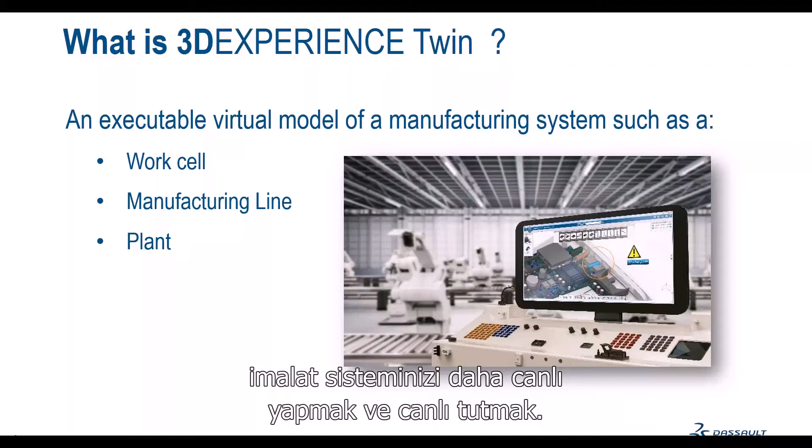Then for 3D experience twin, what is it? It is in fact a virtual model of your manufacturing system, and this manufacturing system can be a work cell with one robot or a special machine, for example. It could be a complete manufacturing line, so several robots and machines linked together. It could also be the entire plant with all your production system inside, working in a virtual world. The idea of this 3D experience twin is to make your manufacturing system alive. Now we are going to show you how we are doing that.

So first, why? What for the 3D experience twin? You have to know that making a 3D experience twin is dedicated to two kinds of users. The first kind will be a production company who needs to see their manufacturing line in a virtual world, to be able to check and make modifications in the virtual world before making modifications in the real world. So our first use is production companies.

But we have also a second kind of user: companies who are building manufacturing lines or work cells. For those people, we can propose a tool to help them define their new work cell or new manufacturing line, so that they can optimize everything.

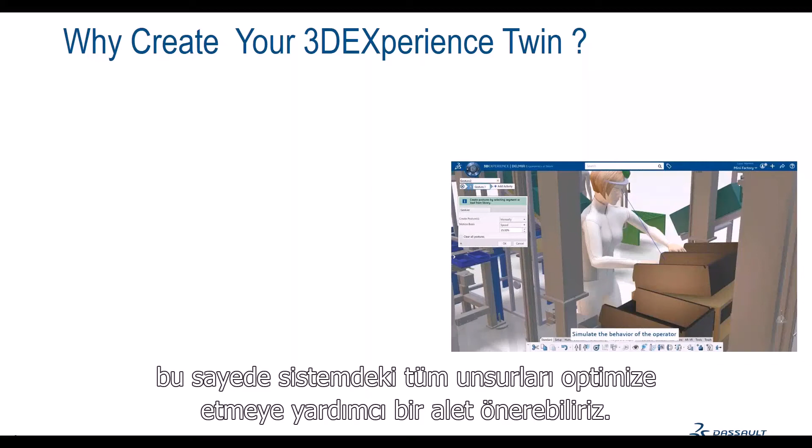So why do we create a 3D experience twin? The first idea is to save time and cost for our users. The idea is to be able to make better decisions before doing modifications in a manufacturing line, whether it's a new manufacturing line or an existing one we want to modify. The idea is to check everything virtually before applying those changes in the real world.

So the idea is to check new product introduction. For example, if you have to adjust the manufacturing line for a new product, you can check that in the virtual world. The second use case is when you want to accelerate production — let's check in a virtual world to identify bottlenecks, for example, and try to optimize virtually before doing it in the real world.

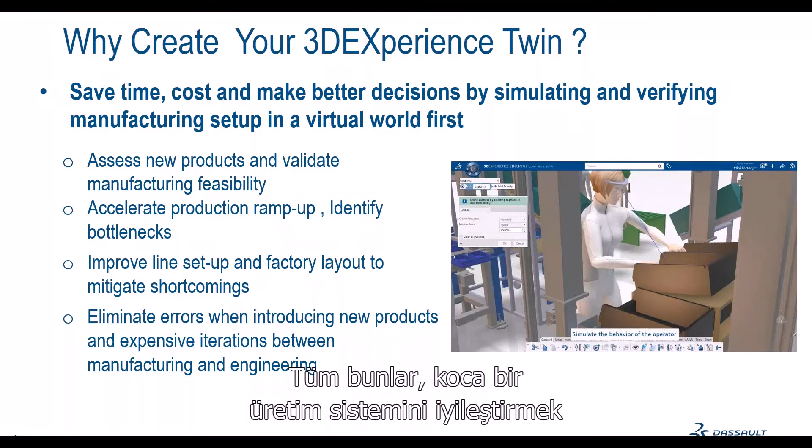The idea also is to improve the setup and layout of a production line. Before moving any machines, let's move them in the virtual world to be sure we'll have a better production system with the new positioning. And the idea is also to try to eliminate errors and problems which could happen when making changes in manufacturing. So those are some different reasons why we use a twin to try to improve our production system.

Now I would like to introduce some words about how we create a 3D experience twin. Damiano and Kartik will show you how we can do that, but let's introduce the idea. First, you understood that we are using the 3D experience platform to do that.

With the 3D experience platform, we are able first to plan operations. Here we are talking about listing all items I need to start my production, for example. I will define a manufacturing bill of material, and I will also define each operation necessary to build my product. So here, in fact, I'm defining my manufacturing operation thanks to the 3D Experience platform initially.

With that information, I can feed the ERP system, but I can also feed the next step of my twin, which is first the layout of a plant. If I know each operation needed to build a new product, I can display those operations inside the virtual plant and then do some studies thanks to the next steps I'll show you. But first, about plant layout: the idea is to use existing data, and that data can come from different sources mixed into the same view.

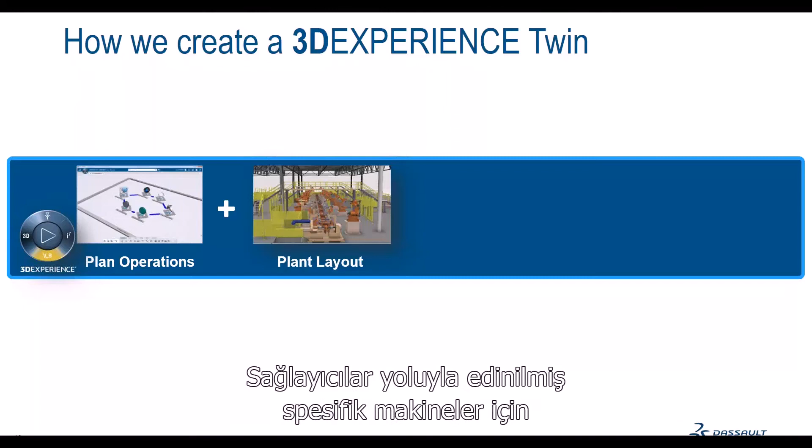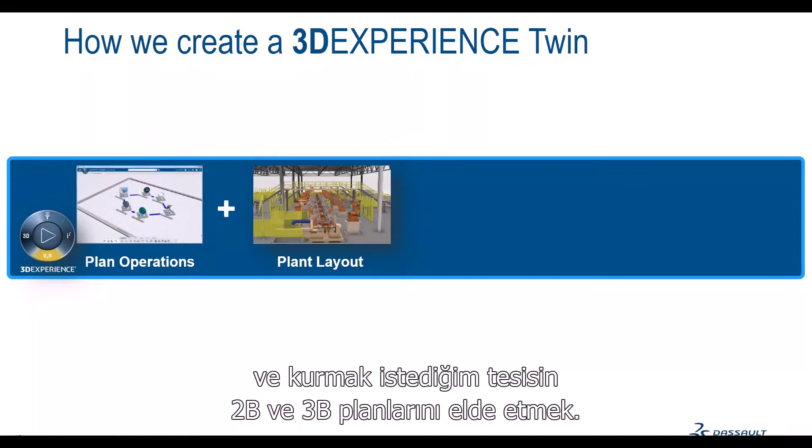With the layout, I can import 2D drawings of the factory, CAD information for specific machines from providers, and also my own CAD data coming from my engineering office. The idea of the plant layout is to mix different sources of data into the same screen, giving a 3D and 2D layout of my future plant.

Once I have my virtual plant in this 3D environment, I can do some simulations. Here we're talking about machine simulation, because we can define kinematics on machines, and also robotic simulation, since we provide a catalog of robots. The most common ones on the market are available, and I think we now have 2,000 robots in this catalog. So we can do machine simulation to check reachability, accessibility, and to avoid clashes with the environment. This simulation is done independently for each work cell.

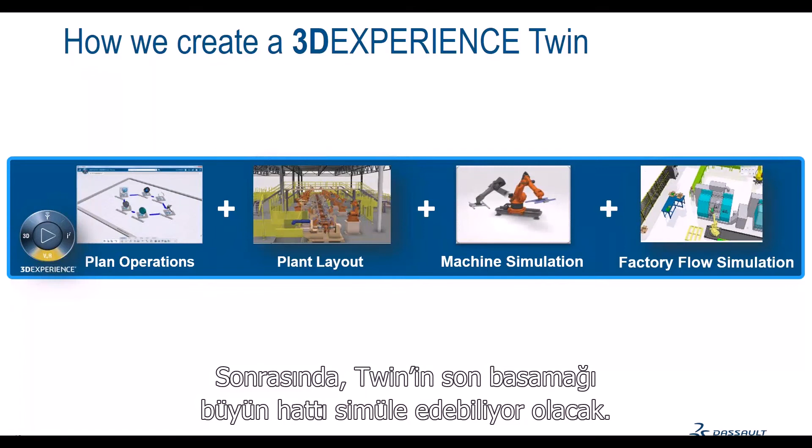The last step of a twin is to simulate the entire line, so we can display our manufacturing system really alive in the twin, check production rates, get KPIs, and make decisions to change things and improve how it's producing. The idea is to satisfy the three pillars: efficiency, performance, and innovation. This is the 3D Experience twin.

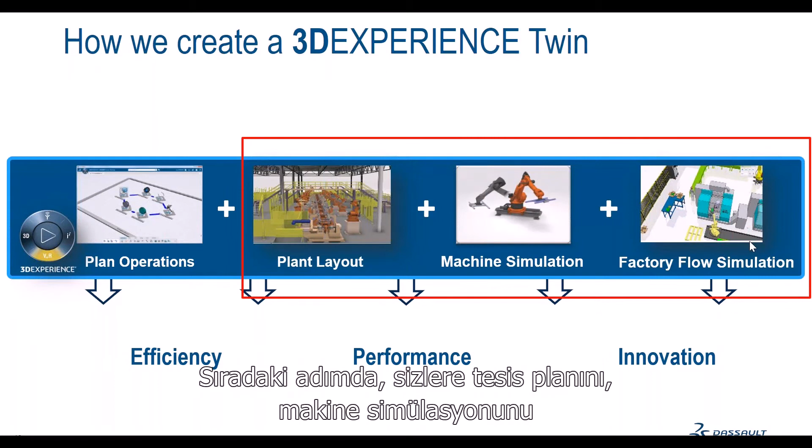For the next speakers, we will introduce only the plant layout, machine simulation, and factory simulation. The main topic is robotics, but you'll see that to do robotic simulation, we need the layout, and from the robotics tools we can also switch to factory flow simulation very easily, thanks to the 3D Experience platform, which brings every domain into the same screen, the same software.

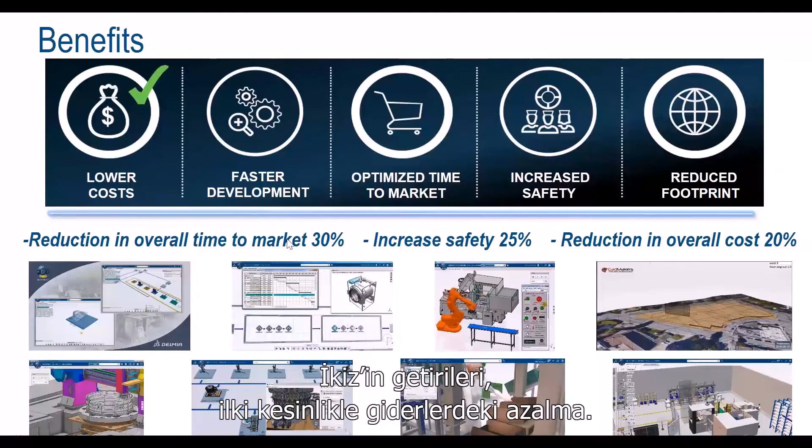The benefits of this twin: first, for sure, lower cost. How do we lower cost? The idea is to generate faster development. Also, when introducing a new product, the idea is to simply be on time to deliver.

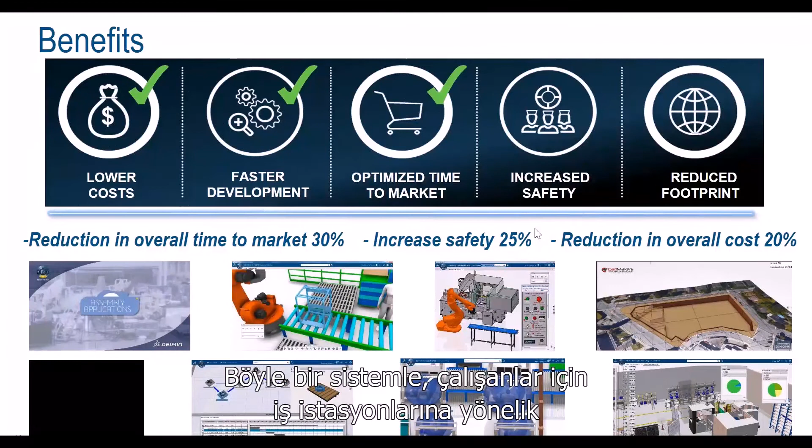This kind of system also lets you increase safety by doing studies on workstations for workers, ensuring everything is accessible for them. So thanks to a virtual world, we can do this kind of study before starting production.

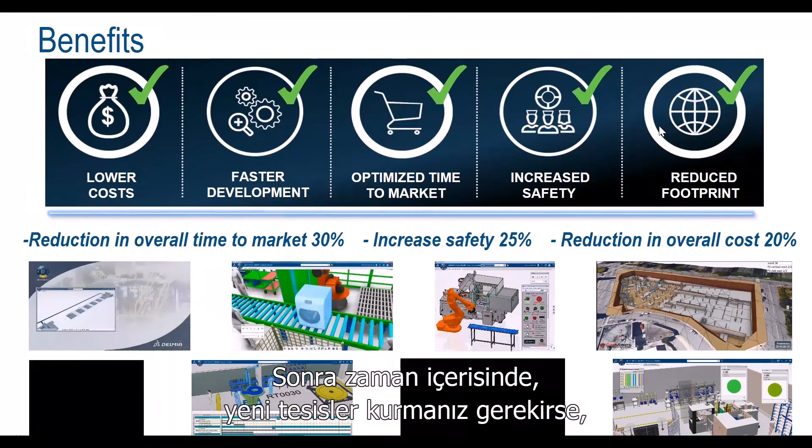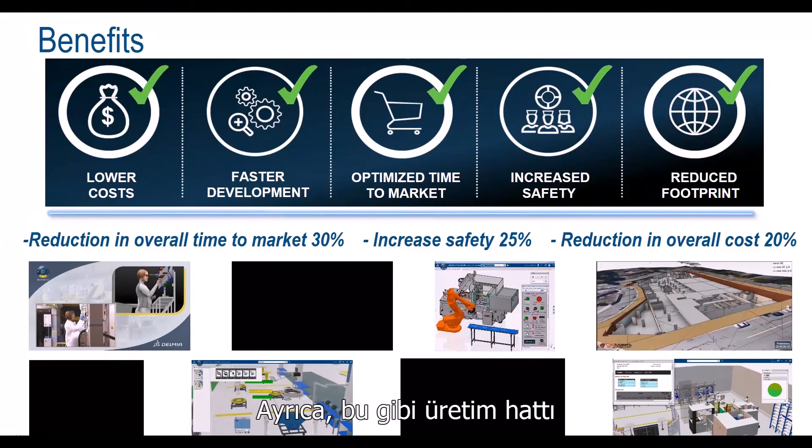More globally, if you have to build new plants, you can reduce the environmental footprint by optimizing how the new plant will be installed. There are many other benefits that help people improve how they are producing, and it's also an excellent way to present a solution for line builder companies that make production lines or machines.

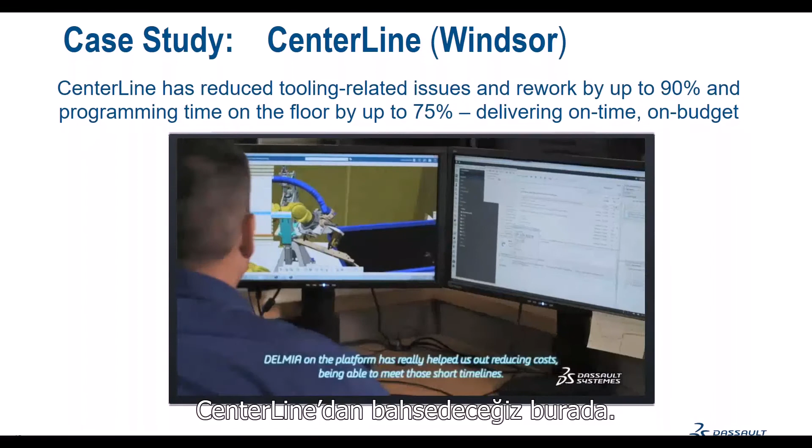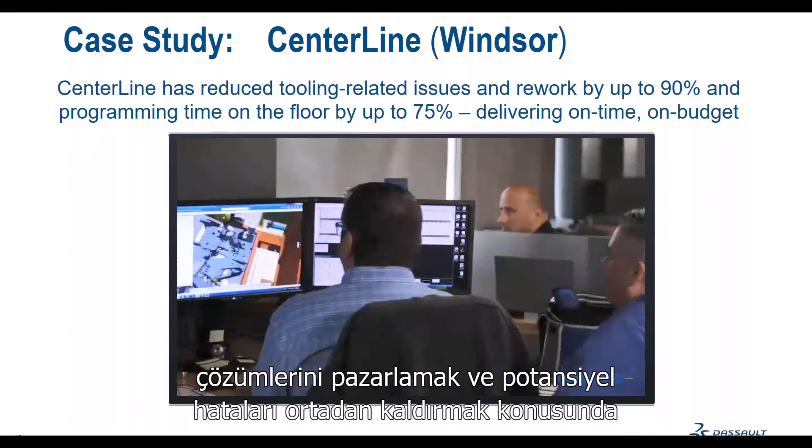To finish, this is my last slide: a simple case study showing very strong numbers. Here we're talking about CenterLine, a Canadian company based in Canada but also with a plant in Romania, Europe. They build robotic work cells, and thanks to the 3D Experience robotic solution, they could really reduce the time to market their solution and reduce potential errors.

Instead of building the real robotic work cell in their plant to test and ensure everything is okay, they do all the tests virtually before building their work cell only once.

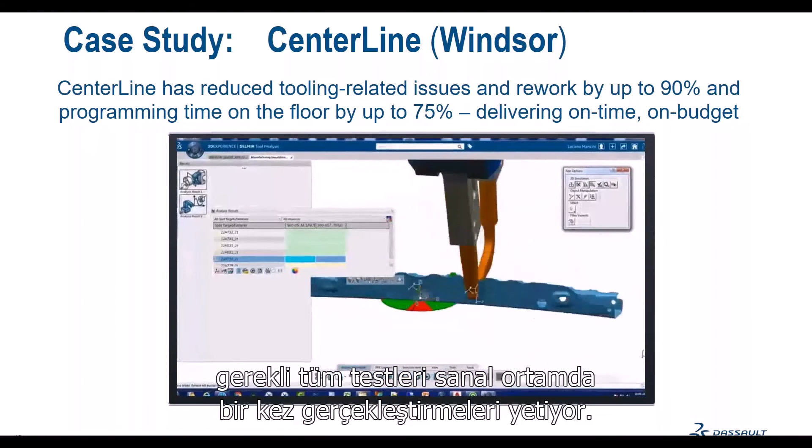So they are really reducing their delivery time because they are doing all studies virtually thanks to the 3D Experience robotics solution. They can also use specific applications, like in this example where they are talking about arc welding, where they are able to check the robot torch angle and satisfy exactly what the customer requested, because the customer requested exactly the right angle to be used by their provider.

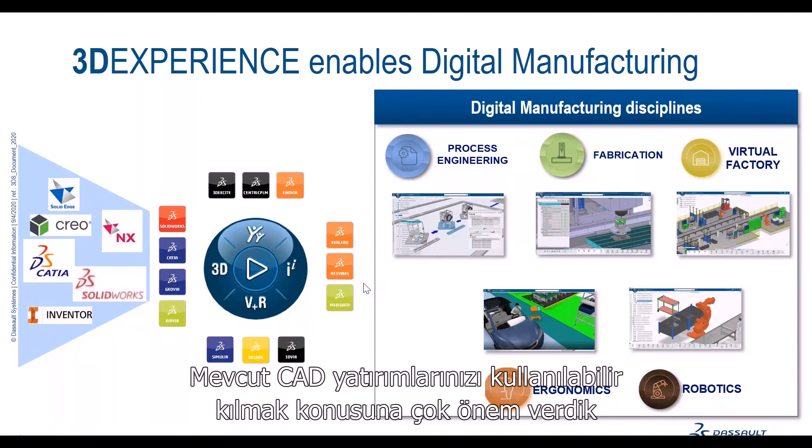So that's the very important step from which we have to start, so we can leverage your existing CAD investment. But then, if we talk about production line definition, we know that there are several steps that have to be performed and several business processes. We are able, with the 3D Experience, to cover basically all the business activities that must be done to design a production line. So we can support R&D to create a library of equipment and a standard solution, and once a new equipment is designed, it can be validated virtually and inserted, for example, in a standard library.

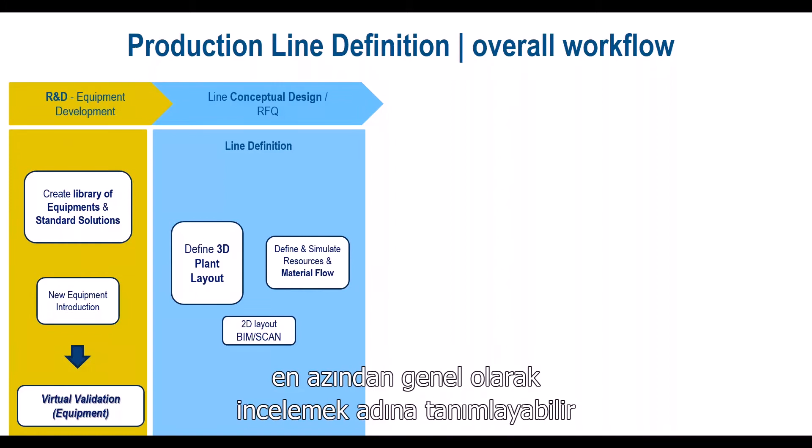Then we have the possibility to support the engineers during the line conceptual design. So for example, during the RFQ phases, so the line definition, we can define the 3D plant layout, we can define and simulate the resources and the material flow to validate, at least in a general way, our line, to say that this line will be able to satisfy the customer requirement and win the deal.

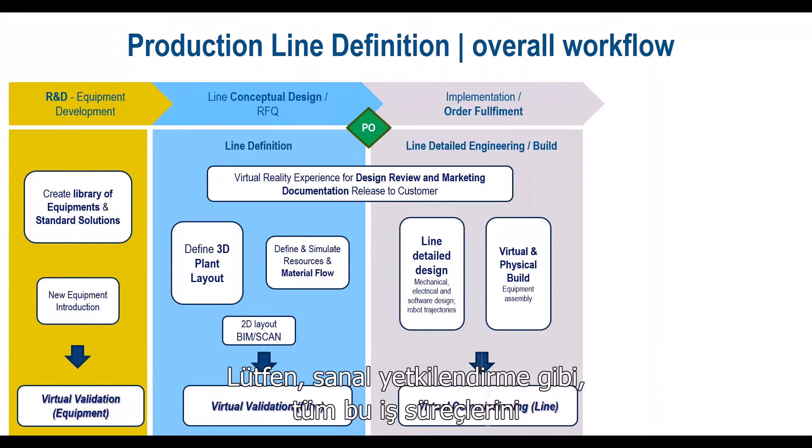And then once the deal is won, we can start to do line detailed engineering. This means that we can start to do mechanical, electrical, and software design, and in particular, robot programming, that is the core of today. But please consider that we're able to cover all these kinds of business processes, like virtual commissioning, and then all the part related to installation and in-service.

So let's start from the typical challenges of line builders. First of all, the market is asking to deliver flexible lines with the right level of performance, to improve the technical tender through the bidding process, to reduce the misunderstanding between sales and customer, and to ensure the digital continuity between the sales and the engineering activities.

So to overcome these challenges, we can propose some 3D Experience applications to help engineers and sales do their job better. The first app is Plant Layout Engineer. This is an application that allows engineers to position and manipulate resources in 3D, to work in a full 3D environment, but starting, for example, from 2D drawings. And we have the possibility to manage catalogs of resources that can be parametric.

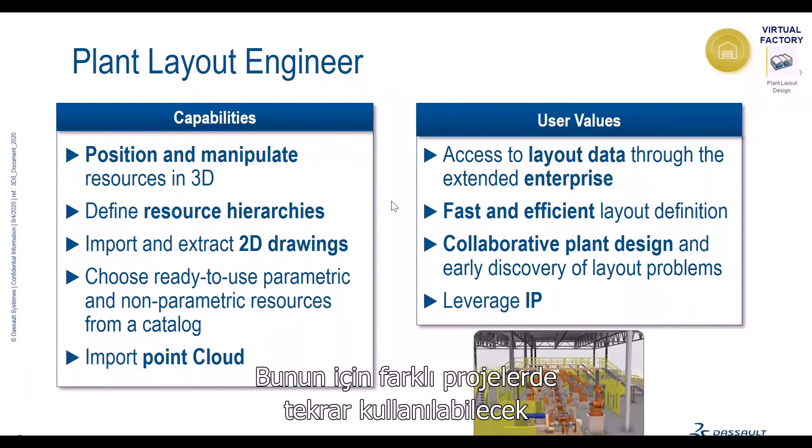The value that this application can bring is the possibility to access the layout data through the extended enterprise, to define your layout in a fast and efficient way. And very important, since we are in a collaborative platform, we can enable collaboration between the different engineers and the sales team that have to collaborate to develop the plant, and, very important, to leverage the intellectual property of the company. So we can create libraries, a standard solution that can be reused across different projects. Now let's start to see the functionalities of this application. The first one is related to the possibility we have to build our 3D model starting from a 2D drawing.

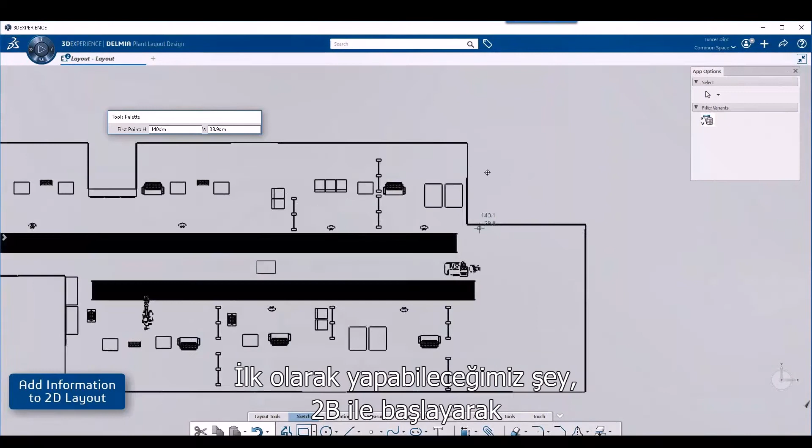So in this case, we are importing an existing DXF file that could be provided by our customer. First of all, starting from the 2D, we can insert additional information using the sketching tools that are inside our platform. So that's the first point.

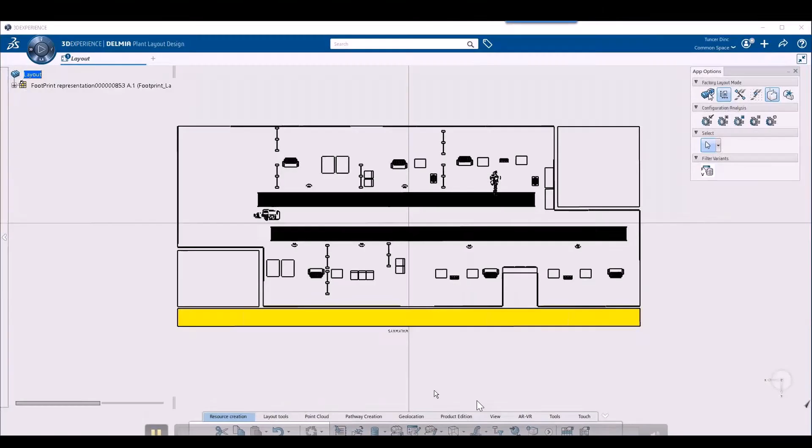So you can see now in the video how easy it is, starting from the 2D that we imported before, to build the 3D layout. For example, you see the structure of the layout. We have several folders and we have organized our resources according to different criteria: tools, storage, infrastructure, robots, and so on.

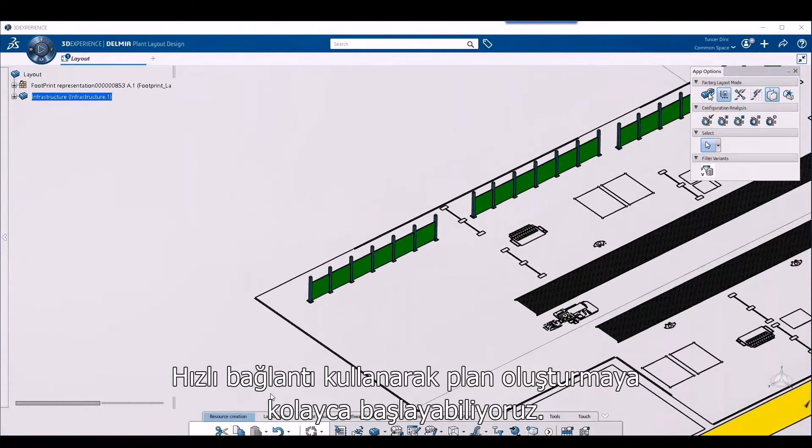Right now we are starting to build the layout, adding the fences to our plant layout. You see how easy it is to insert a resource from the catalog more than one time, just using a few clicks. And if we have a catalog of parametric resources, we can modify the parameters that are available. In this case, I am modifying some parameters related to my fence.

Thanks to some tools that improve the productivity of the plant layout engineers, we can exploit the properties defined on the 2D layout to position easily all the 3D resources and, for example, connect them to each other. The other important thing is that we can generate the layout structure.

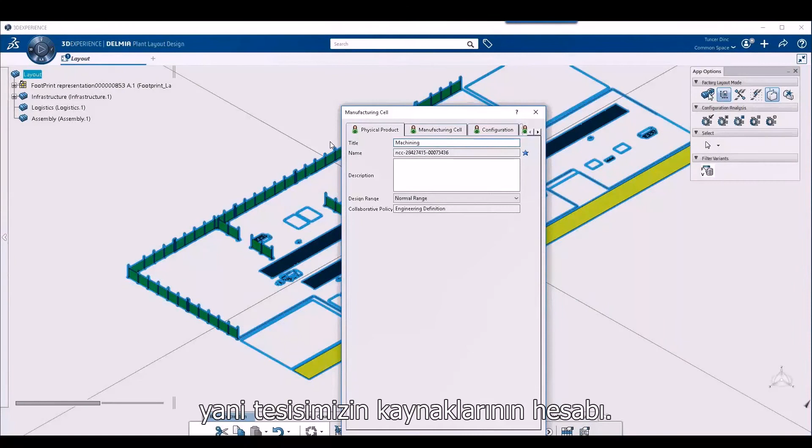So it means that basically we can create the bill of material, the bill of resources of our plant. This would be very important, for example, for cost estimation activities. In this case, you see that I can see how many resources I have in my bill of material of the plant, and I can manage several attributes, for example the purchase cost, but it can be any kind of attribute that can help people estimate the cost of my plant.

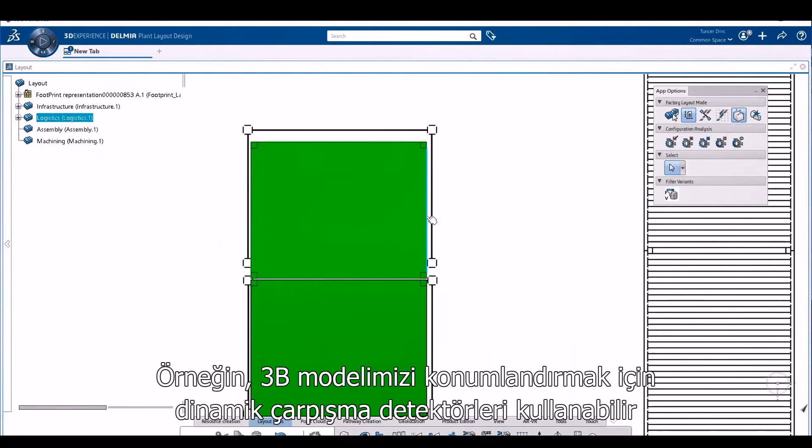Then you see we can continue the definition of our 3D layout, for example inserting some buffers. And then we have some tools, again, to avoid mistakes. For example, we can use dynamic clash detection to position the 3D models, being sure there is no clash between the resources that we are positioning. So this is related to the first step, and you see that we are starting to build our 3D layout.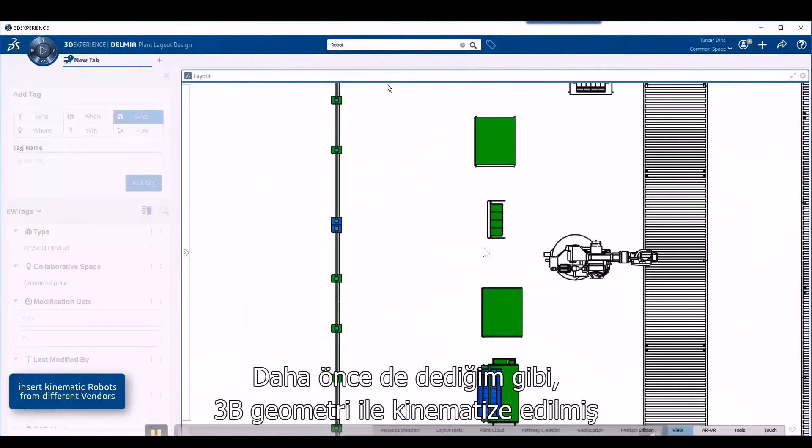Then we can go on inserting other kinds of resources. First of all, this is a very important topic because Kartik will connect to that later. We have the possibility — sorry, let me see, some lag — okay, we have the possibility to leverage, as Erwan was mentioning, a catalog of existing robots.

These robots are already kinematized with the 3D geometry and are ready to use for robot programming. In this case, you see that we are continuing the development of our layout, and we are inserting, for example, this robot from ABB. But again, we have all kinds of robot vendors inside the platform, so it is easy to replace this robot with another one.

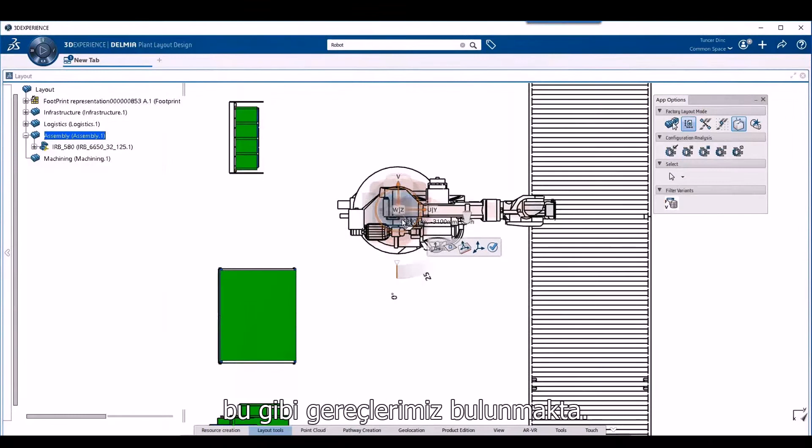So we have, again, a sort of tools to improve the productivity of the plant layout engineers. You see that we can position the robot. We have the 3D model of the robot that will be used later by Kartik to do a robot simulation.

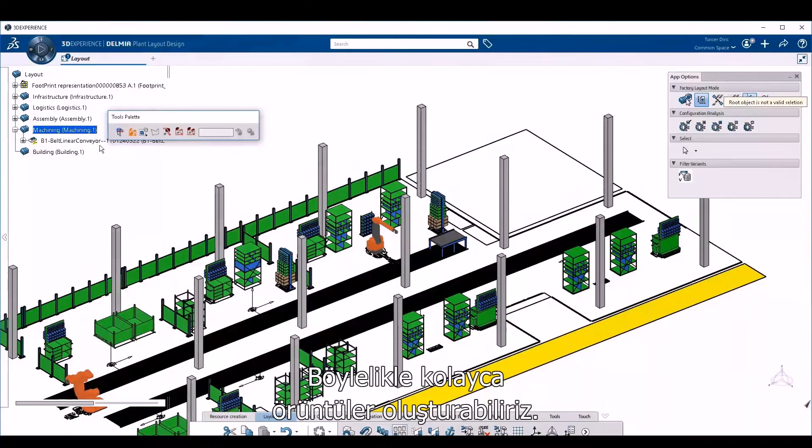Another important feature we have is the possibility to create patterns of resources easily. In this case, you see we are continuing the layout definition, adding the conveyor to our line. Again, this conveyor is a parametric resource, so we can modify, for example, the parameters related to its dimensions. And as you can see, we can create patterns easily, deciding how many times we want to repeat this item, specifying some offset between the resources, and then deciding, for example, to snap them.

But again, we have a lot of tools and we cannot show all of them due to time constraints, tools that improve the productivity of the plant layout engineers. The last point that is very important, in my opinion, is related to the possibility to handle point cloud data, so we have the possibility to import it.

Oh, sorry, there's some lag again. Okay, as you can see, we can import, for example, scan activities... to import existing. What happened? I don't know if someone is doing something. Okay, because I'm not touching my mouse.

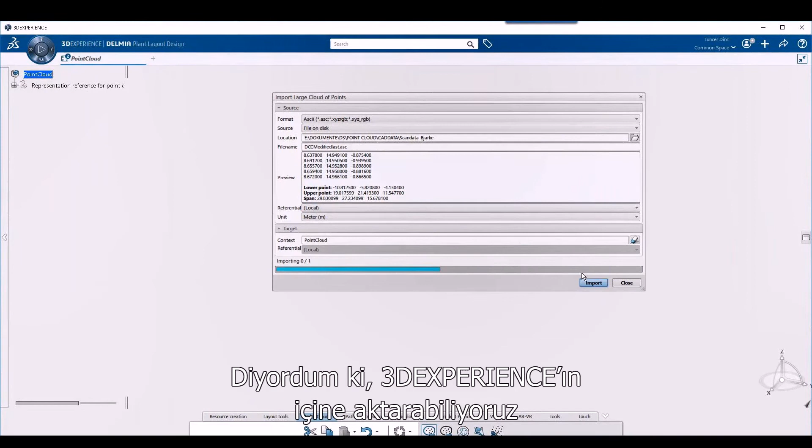Again, you can import your point cloud inside the 3DEXPERIENCE, so the scan of your existing line. This is very important in case of revamping activities or modification activities.

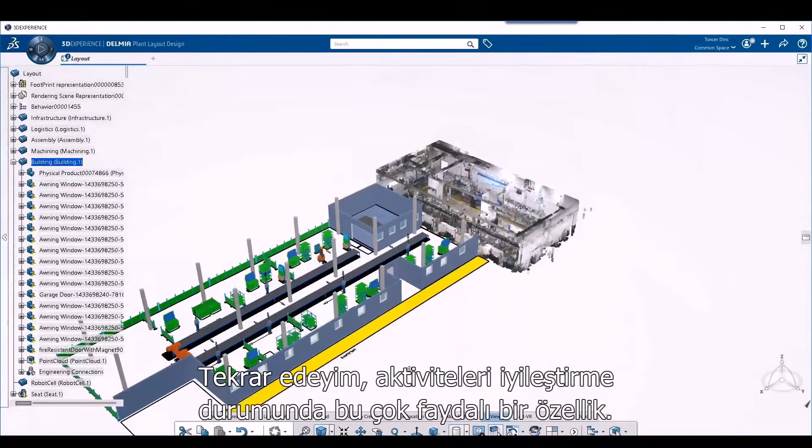So you see here we are exploring the 3D model that we have imported, the point cloud. And then, very important, we have the possibility to create a hybrid layout composed by point cloud and the 3D models that we have defined so far. Again, this is very important in case of revamping activities. So that's all for the layout definition.

Before passing the ball to Kartik, I will introduce another role, the industrial engineer. This role is very important because it allows you to simulate your production line in the context of the execution of the production plan that will be executed on the line. So what we can define is the material flow and the resources simulation, and we can perform discrete event simulations.

So we can leverage this kind of simulation engine, and then after the definition of the routings of our product, some parameters related to buffer capacity, transfer time, the property of the conveyor system like the speed of the conveyor and so on.

We can simulate our production plan and see the result. So basically, we can see if our line or our cell will be able to satisfy the customer requirements in terms of productivity, so we can evaluate the throughput of our line. And since we are in virtual, we can perform several what-if simulations.

The value that we can bring with this kind of application is the possibility to validate the behavior of a station, a line, or a complete plant. We can detect and alleviate bottlenecks to validate early the manufacturing process plan in the context of the line that will execute this manufacturing process plan.

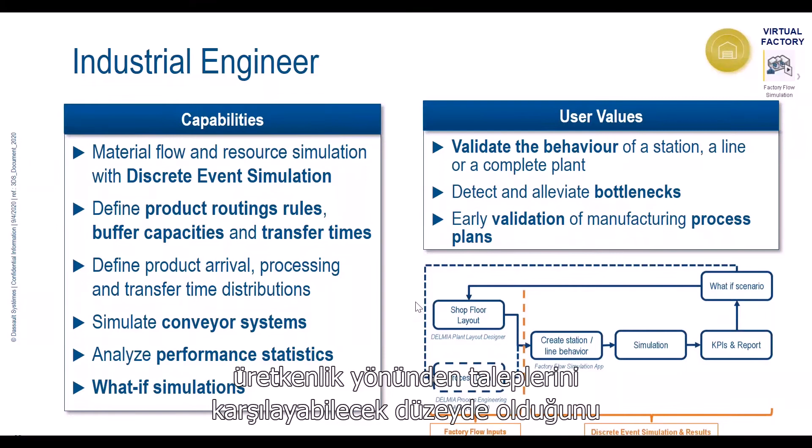And at the end of the day, this will help demonstrate to our customer that our cell, our line, will be able to satisfy his requirements in terms of productivity.

So here we have a very simple example in which we start from a plant layout defined before in 3D. Let's see the example right now.

This is an example of an assembly line in which we have both manual and automatic operations. In this case, the assembly line is assembling some seats, and we have two different variants of this seat: the standard one, that is the yellow one, and the premium one, that is the brown one in leather. We have 6 manual stations of assembly, plus the robot that will perform the ending operation at the end.

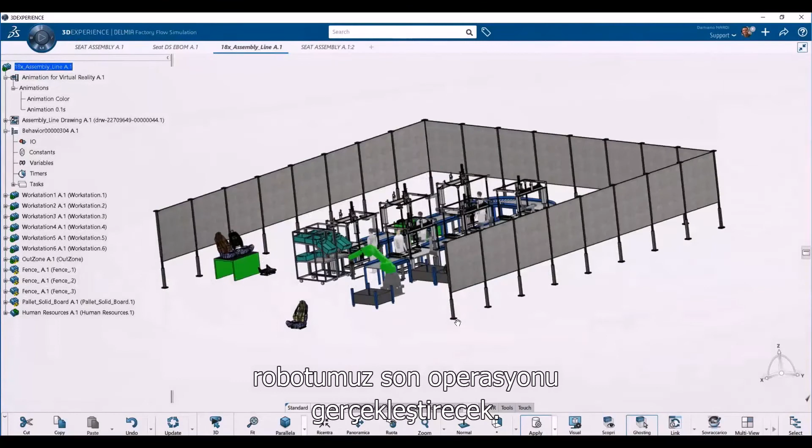But again, this is just a simple example. You see here all these blue and gray arrows are the product flows that happen inside our line. So we have defined the product flow, and for each station, we have defined which are the operations that will be performed.

According to the discrete event simulation activities, we can define which are the input and the output of the station. We can connect the 3D models, as you can see, and this will be very easy, for example, to communicate with your customer and explain to him which will be the behavior of your line.

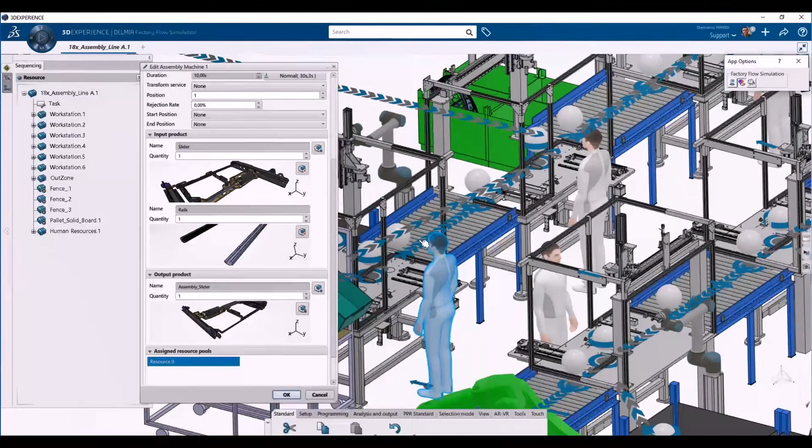And again, we can assign the resources because this kind of engine is simulating at finite capacity, considering the resources utilization, which is very important to identify bottlenecks. Then we can define the parameter of the buffer, like the capacity.

Again, we can manage a complex production plan, meaning that we can have on the same station 2 different assembly activities, one related to one variant of your product and the other related to another variant. In this case, you see the standard and the premium seat again. So we can manage this kind of complexity.

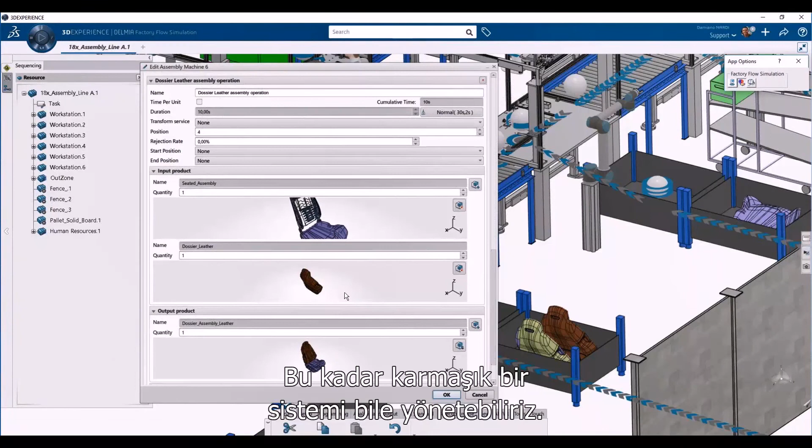And again, we can always connect the 3D model because we are in the 3DEXPERIENCE, and we believe that the 3D model is a universal language that can be understood by everyone.

So now you see that we can define the input for each station, and we can define the schedule. So we can basically specify which will be the production plan that will be executed: which lots will arrive, which is the lot size, which product will be assembled. So we can define our schedule that will be executed by the discrete event simulation engine.

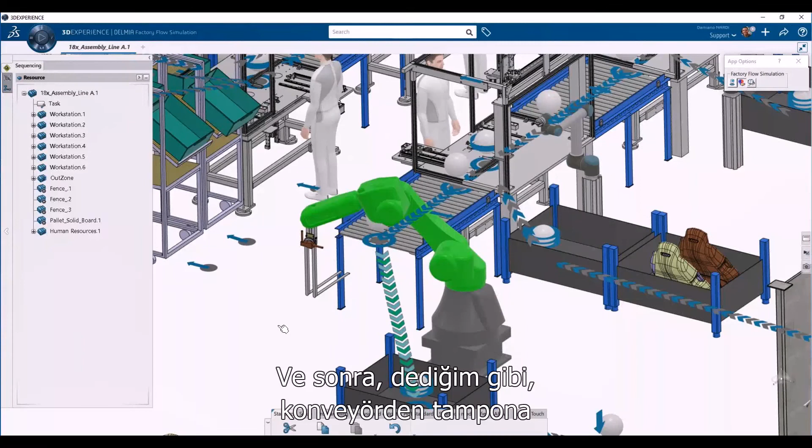As I was saying, in our line we have an automatic operation handling the finished product from the conveyor to the buffer, and we've specified that this robot will perform this activity. At this stage we are not programming the robot, we are just analyzing the productivity of our line. Then Kartik will show you how to program this robot.

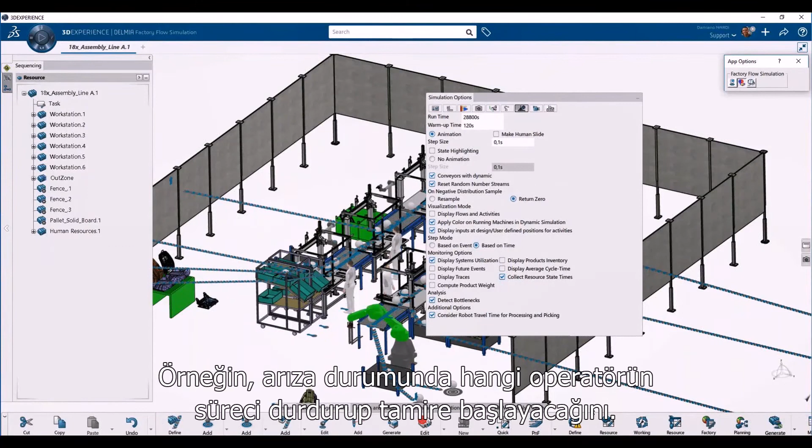Another important thing related to discrete event simulation is the possibility to consider the failure of our resources. For each station we can define the mean time between failure, the mean time to repair, and which resources are in charge of the repairing activities. During the simulation, according to a certain probability distribution, a failure will happen, so the operator will stop the assembly process and start to repair, and the line may stop because the resource is not available. So we can demonstrate to our customer the robustness of the solution we are developing.

Once we have defined everything, we have the possibility to analyze the factory flow status. We have a series of tools that help the industrial engineer be sure that everything has been defined properly, so no mistakes during the design of the line have been made. Then we can simulate again using the discrete event simulation engine.

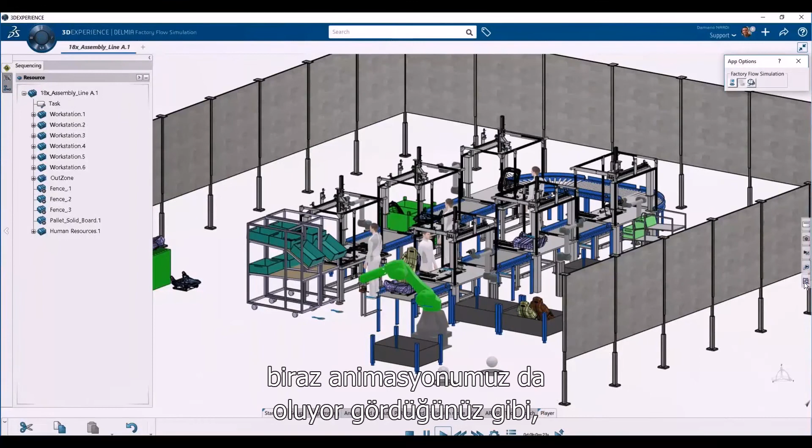So the simulation is starting. You see here we have a bit of animation that can be used to show our final customer how the line will behave. In real time we can see the state of our resources. Graphically we can see all the resources involved, for example human, machines, buffers, and so on. We can see in the legend if the resource is working, waiting for input, waiting for output, and so on, so we can understand immediately if the line is well designed or not.

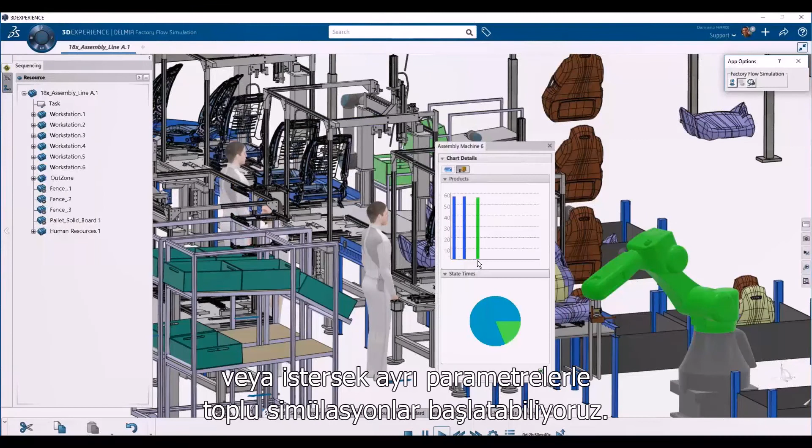Again, we can see this in real time using the 3D animation, or otherwise we can launch batch simulations with several parameters and just look at the results. But again, you see here in real time, it's very powerful to see the result.

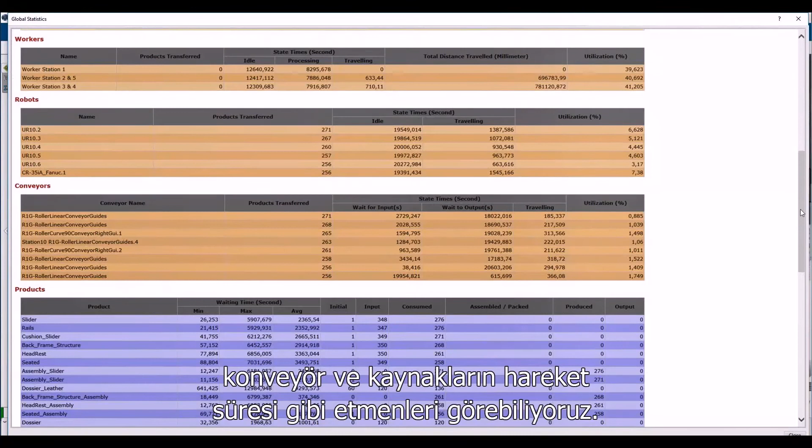Once the simulation has finished, we have a series of KPIs to see the resources utilization, the storage utilization, the mean time of the operations, the traveling of the conveyor and of the resources. So we have a huge number of KPIs that we can analyze to see if the line, the cell, or the plant we are designing is working properly or not. And then we have the possibility to export these results to an Excel file and so on.

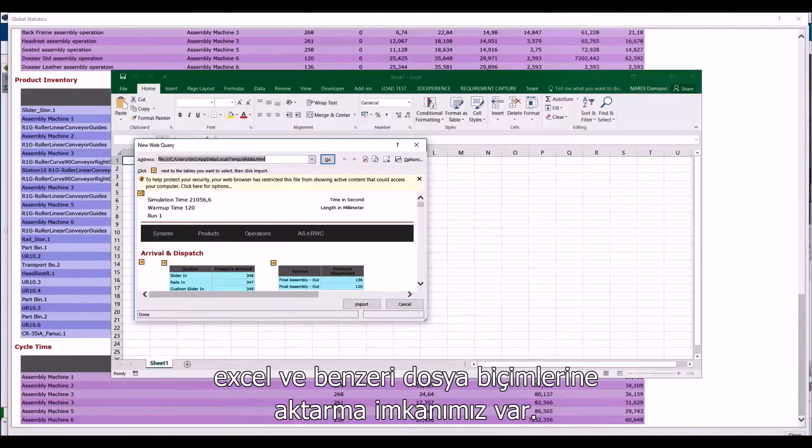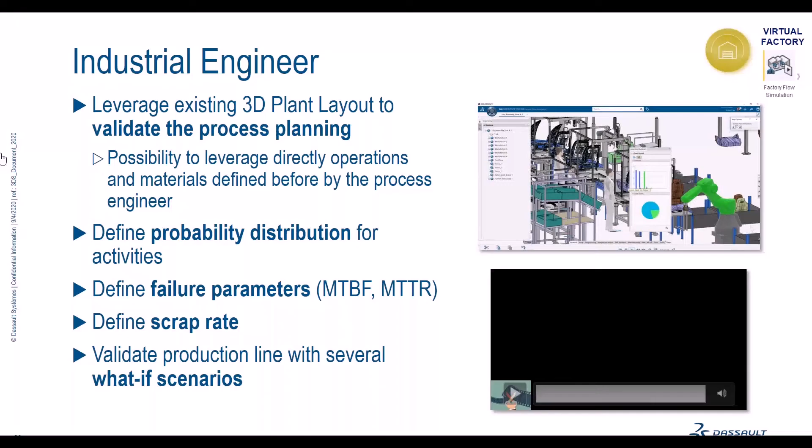So just to conclude before passing the word to Kartik, we have seen two applications: one for the definition of the 3D layout, and the other to perform an early simulation of our production plan applied to our plant. The benefits we have seen are related to the possibility to define your layout in a fast and efficient way. You can save time and money by designing and validating in 3D.

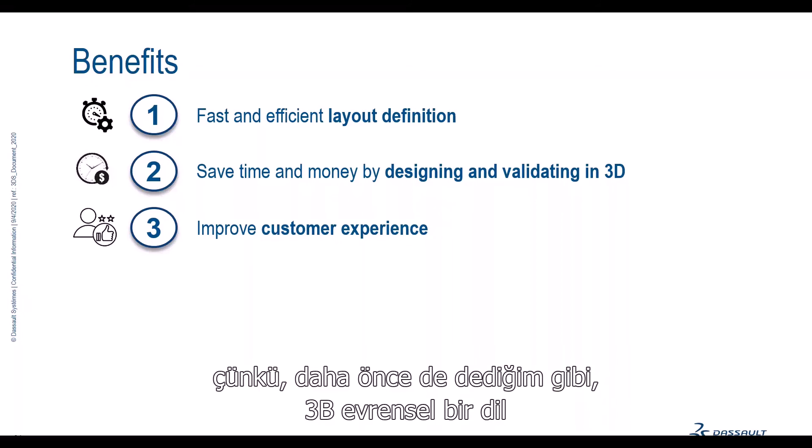You can improve your customer experience because if you design everything in 3D, 3D is the universally understood language, so your customer will easily understand what you are designing for him. You can reduce the constraint on investment by validating the line concept very early. You can improve your manufacturing line's performance by optimizing the use of resources and processes. And finally, you can test several production scenarios to improve your line's flexibility and robustness.

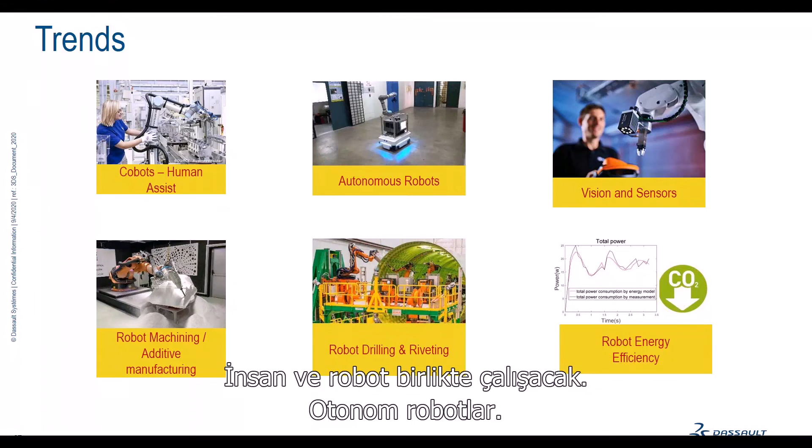Some of the trends: use of cobots, where the human and robot work together; autonomous robots, where robots are installed on an AGV and given a task to execute without much intervention; and use of vision and sensors, with more IoT sensors being used.

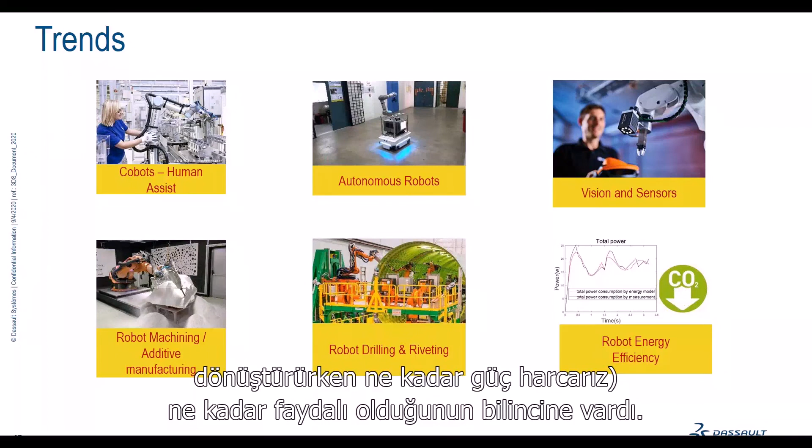Machining and additive manufacturing using robots. In the aerospace industry, a lot of drilling and riveting is done using robots, and companies also have to be cognizant of robot energy efficiency - how much power is consumed when turning a manual application into a robotized one. These are key trends in industries today.

Moving to the next applications. Okay, oh, sorry, there is a lag. Karthik, do you want to present the previous slide?

To simulate and validate industrial robot behavior, we have a role in the app called Robotics Engineer, where we use a catalog of more than 1,500 industry-ready robots with all kinematics defined, along with soft limits and hard limits, for simulation of material handling or assembly scenarios.

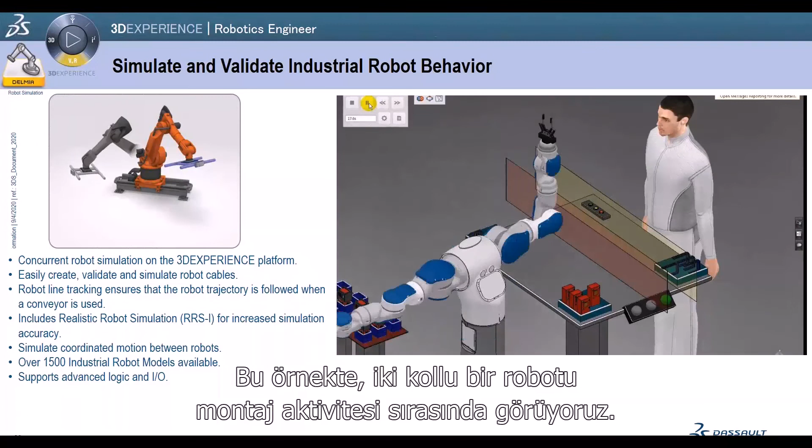In this example, you'll see a dual-arm robot doing assembly activity. There is a light screen or sensor - as a human enters the light screen, the robotic simulation will stop. This is an I/O exchange between equipment and the robot, used predominantly in small electronics manufacturing industries, and we've seen traction in how humans and robots work together in this kind of environment.

This is not mere simulation - we are having industrial robots' I/Os exchanged between equipment and between two robots.

Moving to arc welding, this is one of the key topics I'd like to explain. Many companies define bead fasteners in engineering, but in some cases we don't have a fastener defined in the engineering drawings where the weld has to happen.

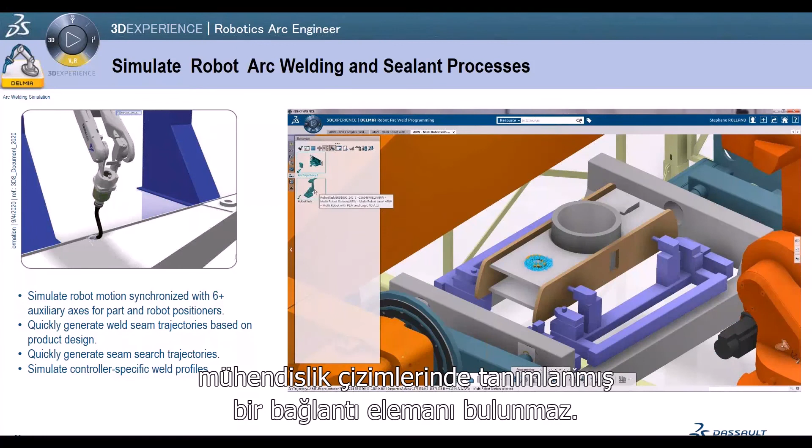The 3D Experience platform robotics arc welding simulation provides the ability to select two intersecting surfaces and a seam will be created automatically. All arc welding parameters - rake angle, angle of approach, angle of departure, deposition thickness - can be simulated so we can generate a collision-free, good robot program at the end of this exercise.

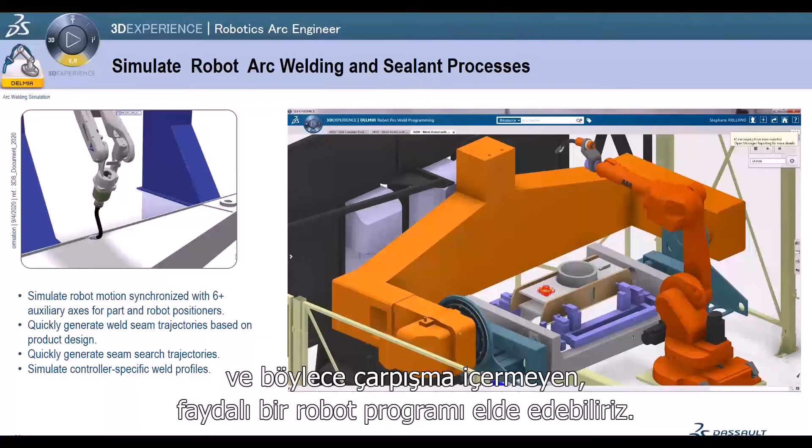Moving next to robot spot welding and drilling and riveting operations. This is very commonly used where we have a library of weld guns within a company from previous or new projects. We analyze the right weld guns and the payload of the robot, then the reachability, and then simulate to balance the spots between the robots.

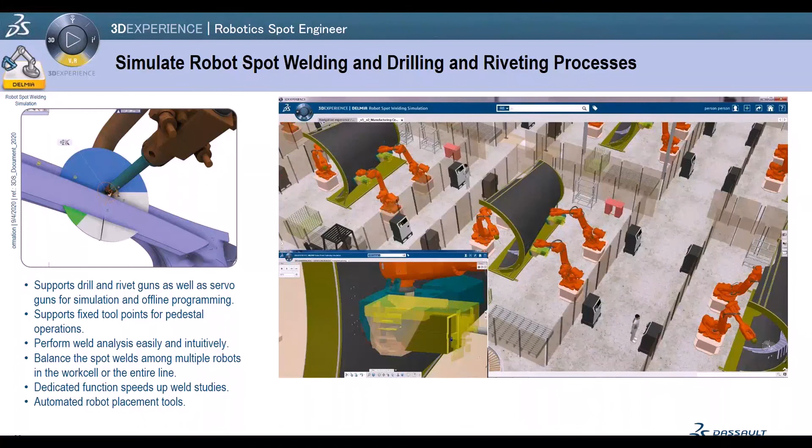Let me explain some use case steps for a typical spot welding project. The product and the process will be prepared by the OEM, or given to us as an industrial engineer. Then we instantiate the resources from the library.

We have more than 2,000 readily available robots, and fixtures would be imported from any CAD system, such as CATIA or other CAD systems. We could get the fixtures.

Once we have the robots and the fixtures with the panels, we will start the gun analysis, where the system will analyze within your library, if you have some 100 robot weld guns, which are the good weld guns based on the geometrical reachability applicable for this particular welding process.

Once we have it, we will generate a robot trajectory from a robot simulation. With the robot trajectory, we will have a robot simulation where we have multiple robots, where the inputs and outputs, the binary signals, are used between the robots to communicate or synchronize, to make sure there is no collision between the robots.

Once we are happy with the simulation takt time, the simulation speed, all the soft limits, hard limits of the robot, with the acceleration and deceleration in the simulation tool, we will generate a program download, which I will explain later about offline programming.

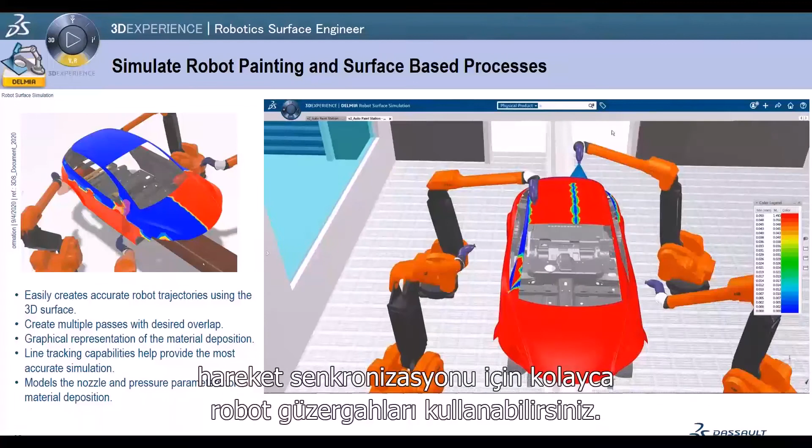Moving to the simulation of painting and surface-based applications, we can easily generate robot trajectories to synchronize motion between the moving rail object, where in this example the car is moving. In some examples, the robot is also moving, where the robot is on the rail.

We have the graphical representation, where we see the deposition thickness in microns with respect to the electrostatic painting. All the paint parameters, such as the nozzle parameters, the paint speed, the viscosity of the paint, the temperature, everything is considered in this robot surface simulation.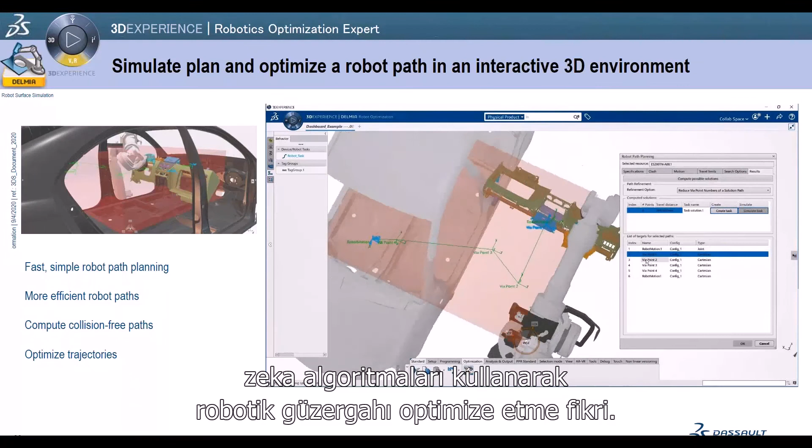One of the interesting trends we are noticing in the industry is optimizing robotic trajectory using intelligent algorithms. In the 3D Experience platform, we have this robot planning, path planning algorithm, where you will see if there is a collision between the robot and, let's say, the fixture in this example, or the clamp.

The algorithm will automatically create via points in the robot task, making sure there are no collisions after this algorithm is finished. Now you see there's a new task where you will see automatically the program modify the trajectory, and you will not have any collisions in the simulation.

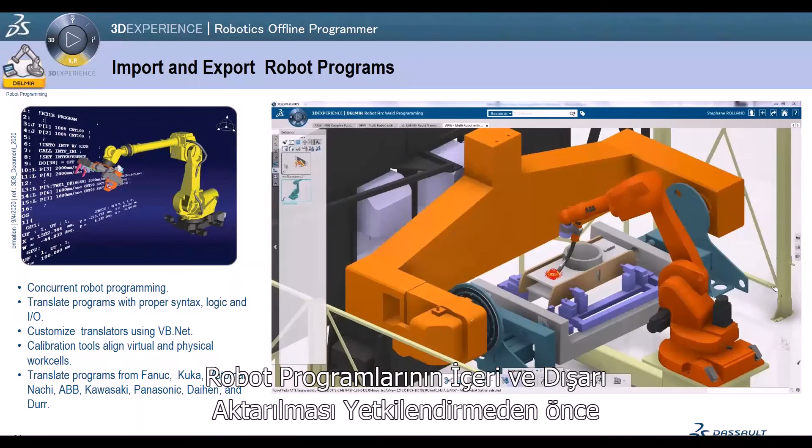Import and export of robot programs. The idea of generating a robot program which can be used in a robotic cell before commissioning is more important, along with the idea of importing an existing program from the shop floor.

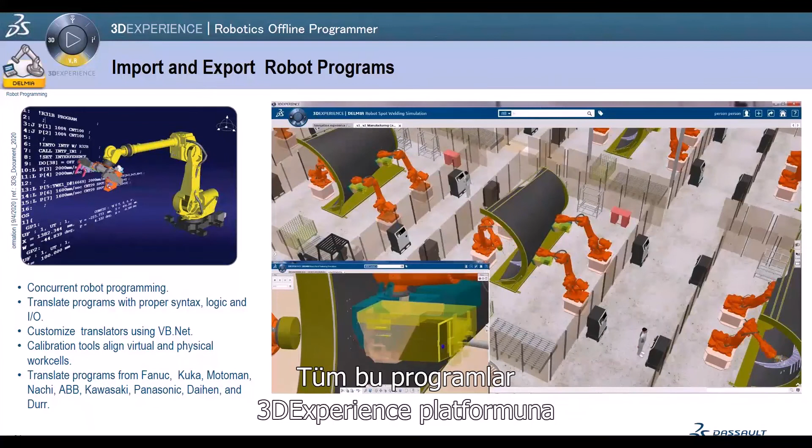Let's say you have done a project where you have the robot programs already. It could be any vendor, Fanuc, ABB, KUKA. All these programs can be uploaded into 3D Experience platform to validate the current behavior.

And if there is a modification, we can modify these programs in 3D Experience platform, and then download the program from 3D Experience platform and send it to the real shop floor.

To have an interaction between the real world and the virtual world, there is something called translators that we use, where the neutral natural language from the Delmia 3D Experience platform is converted into robot-specific languages. For example, Fanuc has its own syntax and keywords, and KUKA will have its own keywords and syntax.

All this is translated from the 3D Experience platform so that the customer doesn't have to spend more time analyzing it in the real shop floor.

There is an important concept in robotics called RCS or RRS, the realistic robot simulation. I would like to take a quick minute to explain the difference between RCS and RRS. RCS is nothing but the software given by the robot vendor, and RRS means realistic robot simulation.

When we do the simulation with the 3D Experience platform, all the motion parameters are proprietary Dassault Systemes, where we use the acceleration, deceleration, or the machine data, so-called in the industry as MADA. All this information is used via the Delmia motion controller.

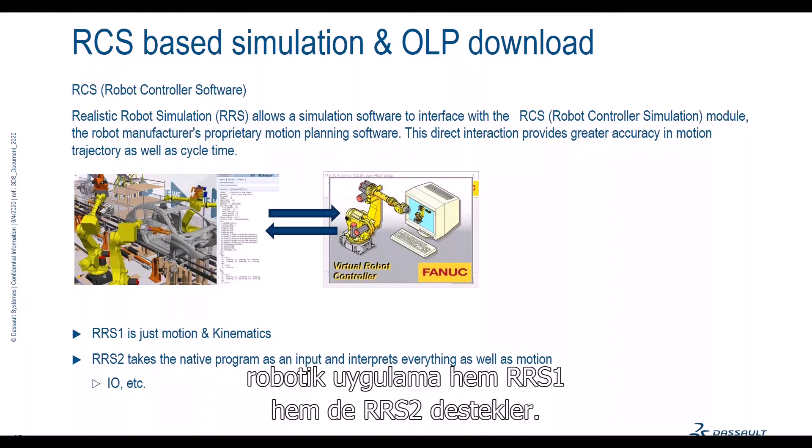So why should we do the RRS? Important question. We need it to get an accurate cycle time when doing a complete line definition. Robot vendors provide their own programming language syntax, and we need to use all the information from the existing shop floor to get a realistic trajectory between the simulation world and the real world. Getting closer to the real world is what matters, and that's why RRS is important.

How do we do RRS? There is an architecture behind it. Robot vendors implement a specific RRS specification within their controllers. You have the real robot, which connects to the real robot controller on the shop floor using a cable connection, and a teach pendant where you use the vendor's logic, algorithms, or heuristics between the different joint motions of the robot.

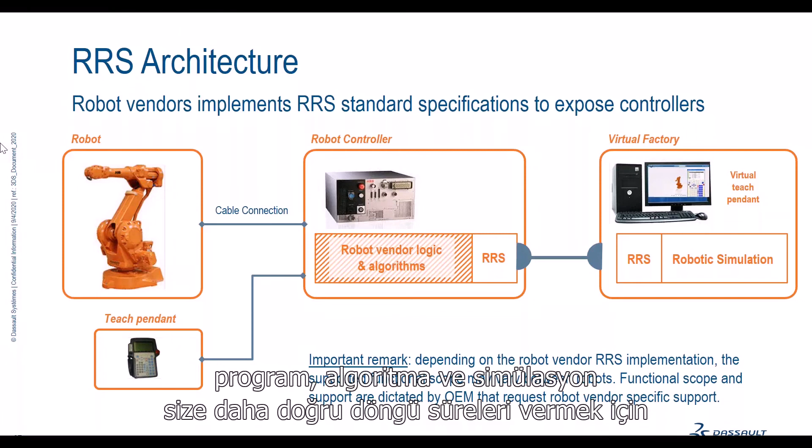What we do is have the virtual factory, or the 3D Experience twin, where we have the virtual pendant. The RRS application sits as an add-on on the 3D Experience platform, where the motion parameters are respected from the robot vendor's logic and algorithms, and the simulation follows exactly the same trajectory to give a more accurate cycle time.

So once we've done the robotic simulations, we have to commission this in the real plant. In the real plant, we'll have more automation, for example kinematic resources like conveyors or material handling, driven by PLCs, where the PLC program is very important when doing a real commissioning.

So what we can do, using the robot virtual commissioning role within the 3D Experience platform, is use RRS2 technology along with the PLC to validate the complete plant layout PLC programs. It's also important to notice we support both hardware and software in loop.

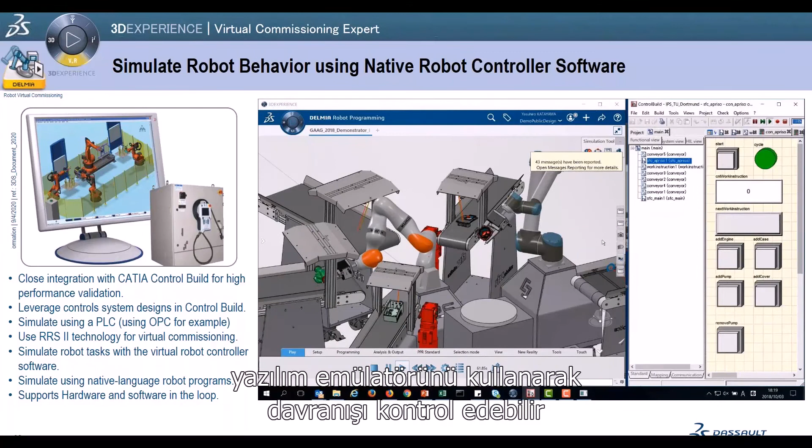What does hardware and software in loop mean? For example, we have a PLC emulator that is software. If you want to validate all the PLC signal IOs between two resources, you can use the software PLC emulator to validate the behavior, or you could use a hardware PLC, which looks like a box. I'll show you in the next picture where you can validate using actual hardware that would be sitting in the shop floor, in a virtual world.

In this example, you see a picture of a hardware PLC. What we're doing is connecting the virtual commissioning PLC system to the robotic simulation with an Ethernet card, which sends the signals. All the IO PLC signals are mapped between the simulation and the existing PLC.

We also support the human-machine interface. For example, you'll have a sensor where the human should not enter. Once he enters, the simulation will stop. All these kinds of use cases get validated much earlier, before you actually go into the shop floor to do the commissioning.

So a quick recap of the benefits. The first point is fast and simple robotic work cell layouts. We have more than 1,500 or 2,000 robots available in the 3D Experience robotics library. If you have any special robots in request, we can always get them inside the library, provided the company supplies it.

Concurrent robot simulations, where we don't just simulate a single robot, but multiple work cells with multiple robots, 50 plus, 70 plus, even 75 plus robots working at the same time. The simulation engine supports this kind of simulation where multiple robots work together.

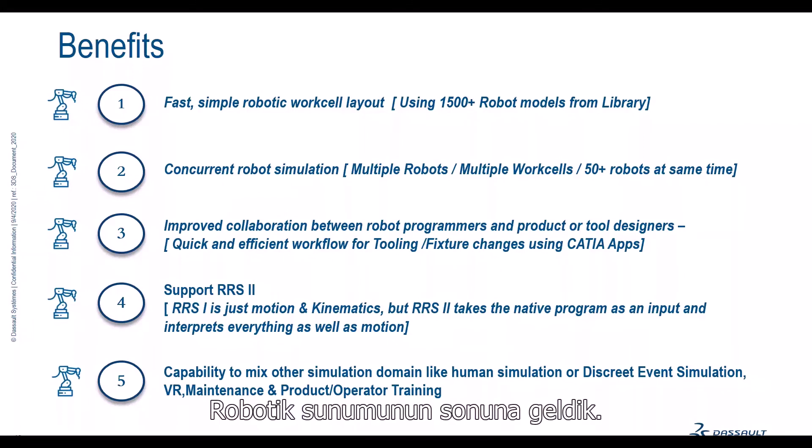And the capability to mix not just robotic simulation but also discrete event simulation, like my colleague Damiano demonstrated earlier, along with ergonomics and virtual reality. This is an area where we can see more and more traction using different simulations working with robotics. That brings us to the end of the robotics presentation. If you have any questions, please ask me at the end of this presentation.

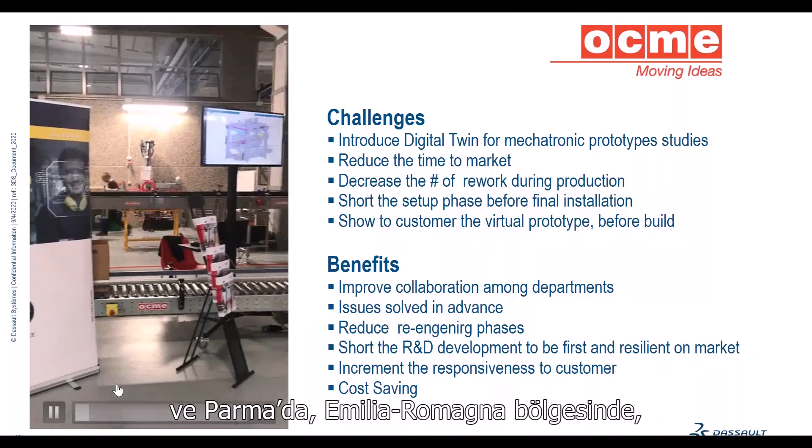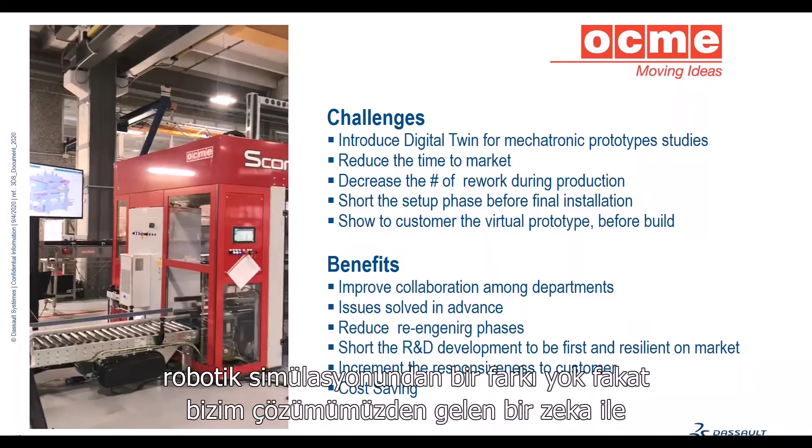The benefits were so important, and it was featured at an important fair in Parma, in the Emilia-Romagna area, called Cibus Tec for food. The data comes from their CAD, we simulate and create the behavior with the kinematics, nothing different to robotic simulation, but linked with intelligence coming from our solution to simulate the PLC and controller behavior.

Kartik spoke about that when mentioning virtual commissioning. It was a very nice introduction to their offices, to the technical department. At the end, they were very, very happy. They bought the solution because we found a real benefit in it.

I bring this example because we can have a few of those companies around, and it could again be a concrete success of Delmia technology. I think Oslem, it's your turn. Thank you very much for your passion in following this seminar, and Oslem, I think, can conclude and wrap up.